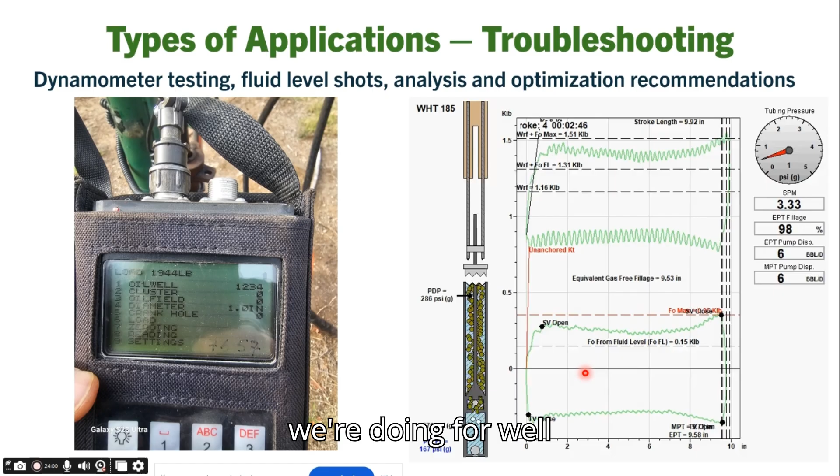So legally in Canada, you do not need a well control ticket, a BOP ticket, for doing any kind of work like that. If you remove the wellhead in Canada, you need a well servicing BOP ticket. So for what we're doing for well suspensions and polish rod changes, you don't necessarily need a BOP ticket for that.

But I can assure you that anybody that has the time and the money to go and get their BOP ticket, it's a load of information. It's an understanding of controlling wells, and it would go hand in hand with this type of operation. But no, you don't need it, Tim. You don't need well control. You just need understanding. Okay, perfect.

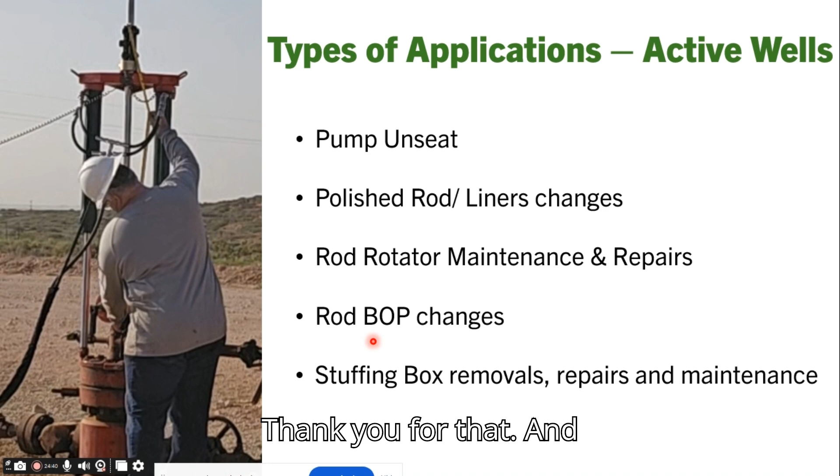Thank you for that. I just want to go back to that well suspension, and hear your opinion on the stuffing box, because we saw a lot of wells with just a stuffing box and polish rod sticking out of the well, and I've heard a lot from oil and gas operations guys here in Canada and in the U.S. saying, well, we'll get to that well when we have time and money. We'll bring the service rig.

So why do you think that stuffing box is actually a high risk for all these emissions releases and pollution?

Well, that's a really good question, Tim, and I'm glad we can elaborate on that because, in my opinion, you and I both know we've seen many wells out there with the polish rod sticking out of them. If they're venting out of the casing, that can be controlled. All you got to do is close that casing valve, right? But if they're venting out of the stuffing box, that's a different story.

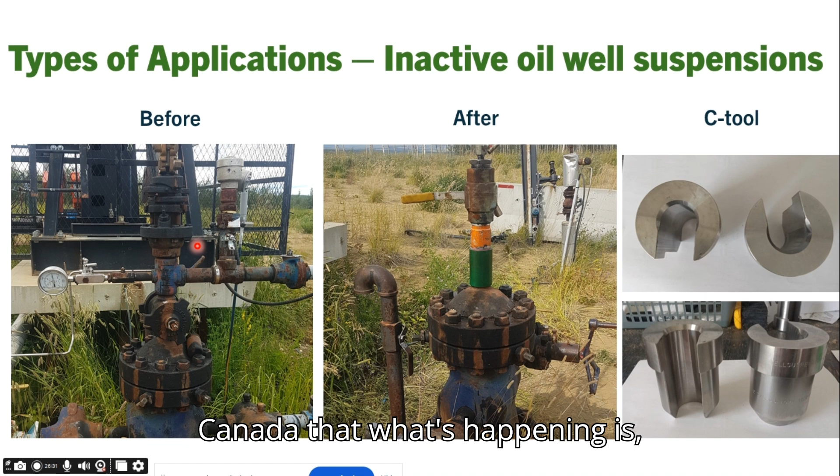Many people can come in and squash those stuffing box packing and maybe quieten it down for another day or two. But it comes to an end when those stuffing box rubbers have solidified, and now you've got a steady stream of methane passing out of that stuffing box. And further to your question, I don't know how many orphan wells throughout America and Canada have this methane passing, and we're trying to totally eliminate the methane issues.

So we've got governments and people working with the governments on this methane problem. But the problem is there's not enough money to get to every well to abandon it properly. What our services can do is come in and shut the methane off now. No, we cannot abandon that well properly, but we can eliminate the methane passing through the stuffing box, at a very economical price too. We can do a number of these and start reducing the methane problem.

Perfect. Yeah, I totally agree with you. So I would say that a 2-inch ball valve and a 10,000 psi needle valve will do a better job than a stuffing box like this.

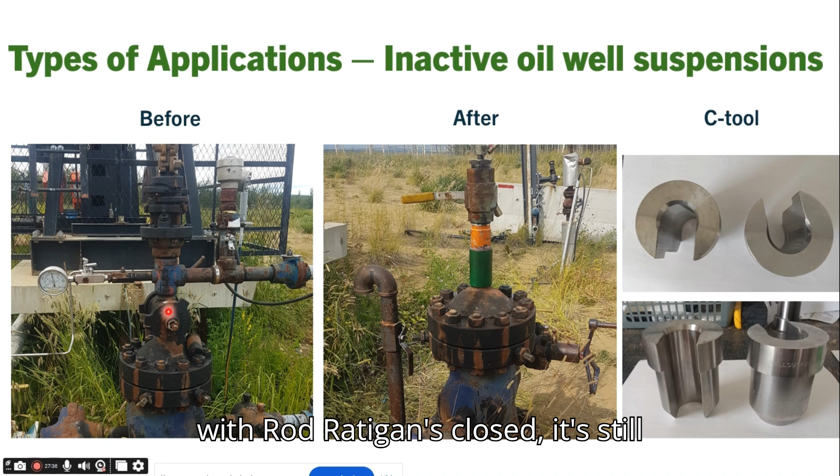Oh, absolutely. Even with Rod Ratigans closed, they still consist of rubbers and some sealing elements that probably can be eroded over time. You bet. Perfect.

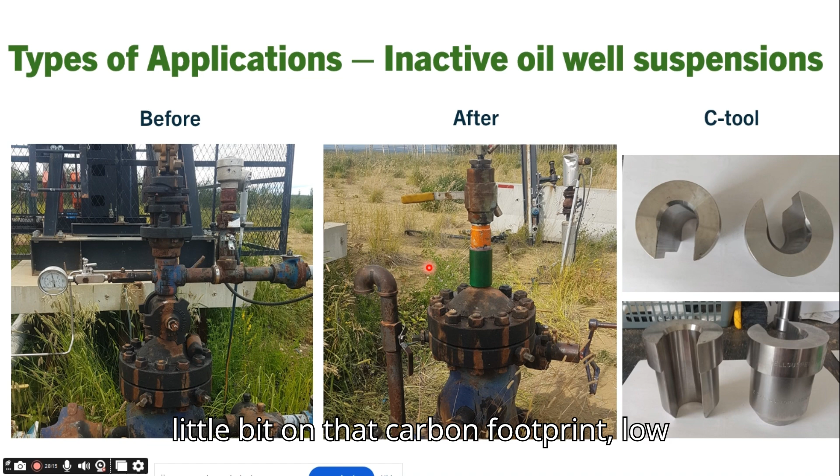Thank you so much, Rick, for that. And probably the last question I have for you. In the beginning, I believe there was a low carbon footprint, right? We know that probably falls under emission reduction, a hot topic in North America. I just want you to elaborate a little bit on that low carbon footprint utilizing the rod jack.

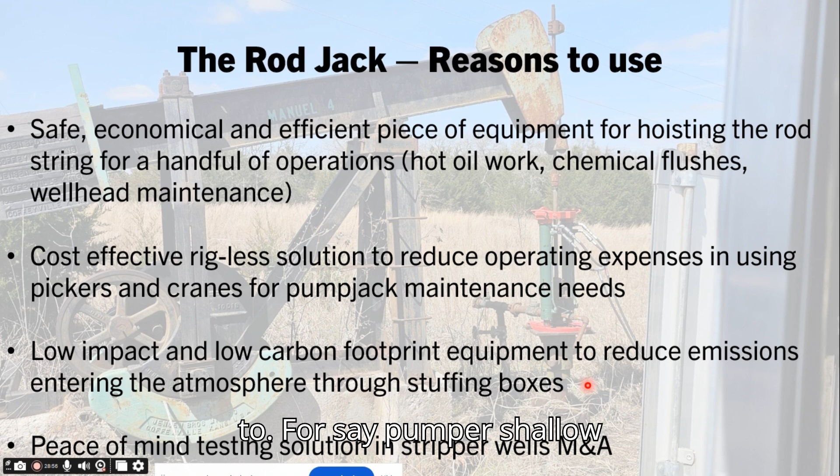Well, I've had this on my mind for a long time. Every day I wake up with another reason for that rod jack to have a purpose. The one purpose I see for the rod jack is actually using it as a solar pump jack. I'm going to give you some ideas we've discussed in the past for setting up a solar pump jack to pump a shallow oil well, because we're not going to get this pumping on a 7,000 foot well. We've got to stick to 3,000 foot and under wells.

We can handle it no problem with the rod jack, and we found batteries and a solar setup that could actually make this happen. When you've got wells out in the middle of the desert or somewhere with no power, and all they ever ran off of was natural gas, they're not running anymore, but they are still an asset.

To be able to move in the rod jack, set up a solar system on it, and have this automated so it would start on a timer, run through the evening, pump off whatever it takes to pump that well off, and then shut down before the sun comes up. The sun and wind can charge those batteries again. Now that's on the oil end of it. I see this being an actual asset for shallow oil wells.

The other end of it is we've got a lot of shallow gas wells that load up. The shorter the hole, the easier to load up and kill the well, so you're continually swabbing these wells. Whereas if you brought in a rod string and ran an insert pump on a slip stop packer assembly, you could set that anywhere you want in the tubing, the best spot being right into fluid, so that if this well is flowing and your flow starts to cut down, the jack would kick in and help unload that extra fluid.